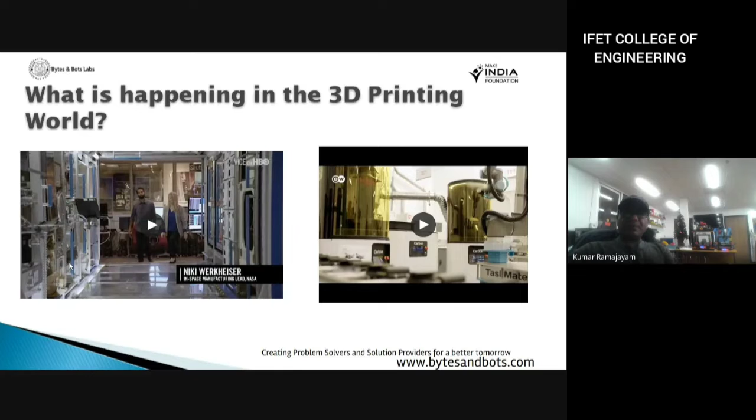I'm not going to go over the videos, you can Google them and watch them. What we're going to cover in this presentation is: what is 3D printing? In the intro, some of the faculty members talked about that a little bit. With a focus on education and innovation, how 3D printing technology has been evolving and is being embraced and used by individuals, hobbyists, and educational institutions, from elementary to secondary to post-secondary educational institutions across the world. And it's the inherent nature of supporting how it enables curious minds to make new things and take an individual's creation to the global market across the world. We'll talk about that.

Some basic information about the different types of 3D printers, what are the different components of a 3D printer, and what can you do with it.

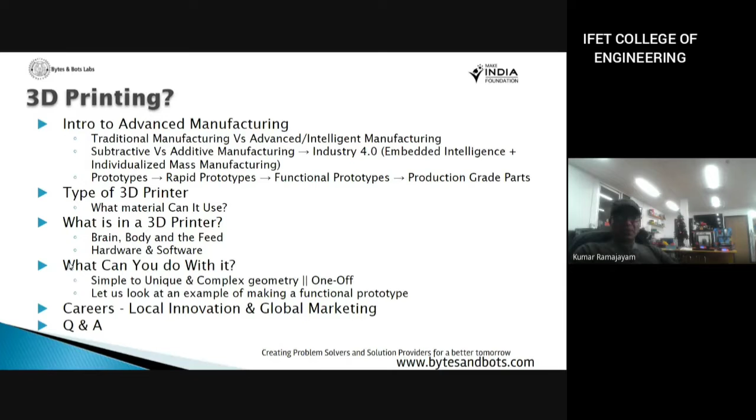That being said, let's move on to our own lab. From an idea that you conceive, you digitize that idea by using a CAD software, saving that off in a file format, and printing it.

So this short video here is showing. Let's get some practice designing a machined part like the one you see here. You can see that for the most part, it's made up of extrude features, which added geometry and removed geometry for the pockets and cuts, as well as some fillets to break the sharp edges.

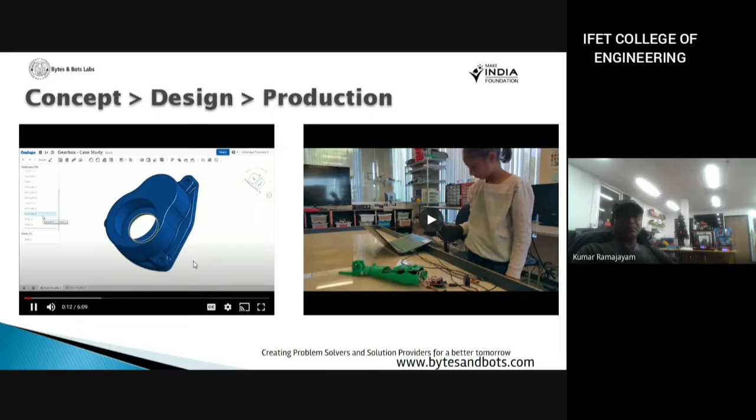Now let me switch over to this other part studio to get started. For this example, I have a sketch already created. The two-dimensional geometry here can be created in Onshape using the various sketch tools and constraints. But for this example, I'd like to show you how you can leverage a sketch like this, which contains multiple sketch profiles, to create the 3D geometry for the part using various features.

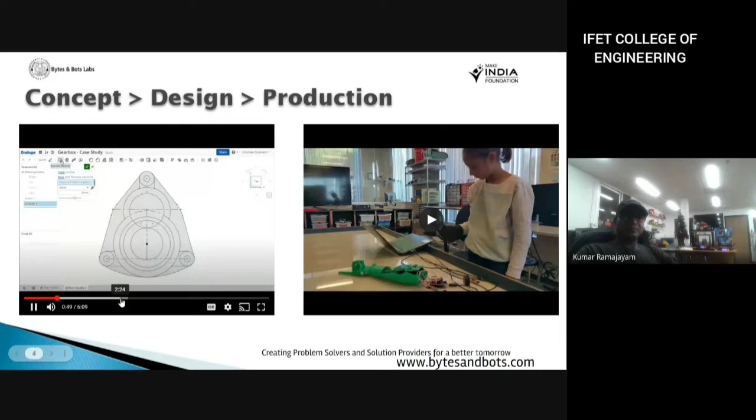To get started, I'll extrude the main body of the part. I'll make sure all of the sketched geometry is deselected and select the extrude icon from the toolbar. I'll select the interior profiles to create the geometry for the body of this part. I'm going to fast forward that for a moment.

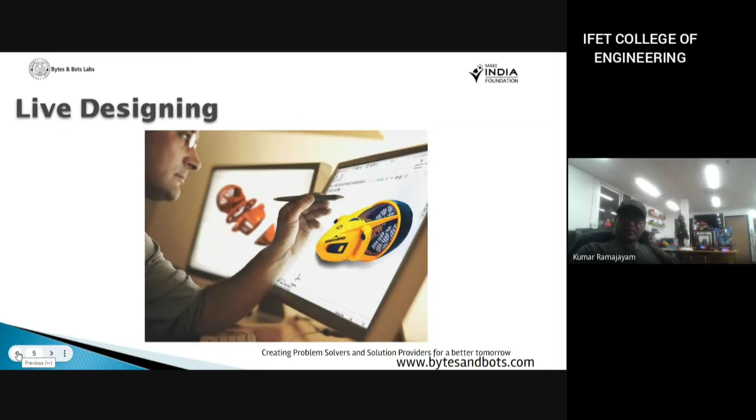So let's move on to this video. Here, digitization of your idea of a product creation using a CAD tool on the computer, and then sending it to the printer. So whether it's a coffee maker or a cup, or say I have my pair of glasses and I wanted to personalize and use my own design to design and print the frames for my glasses, I can do that in a few hours and make a one-off product that is designed and created for my glasses, fitting my face profile the best possible way. And that's pretty cool to do.

And you don't have to be an engineer. You don't have to know everything. You're able to Google most of this, and even download an existing file and modify it. If you have the computer-aided design skills, then you will be able to print it and wear that on your face. The next example: we have a 6th grader in one of our labs who's doing biomimicry in this project.

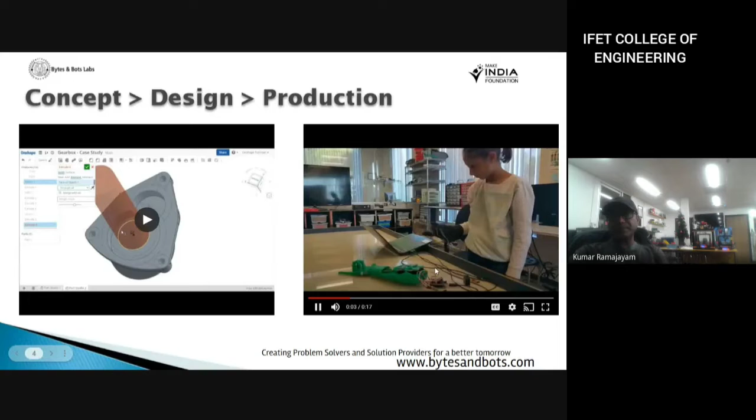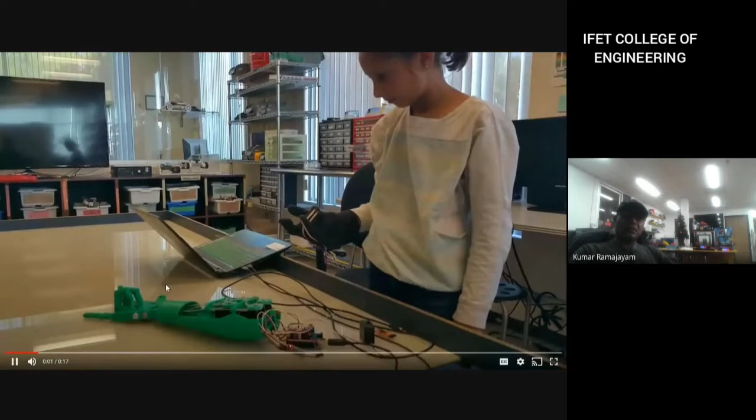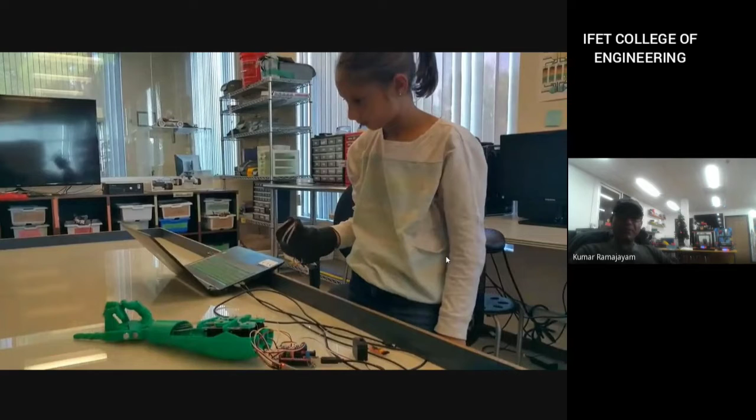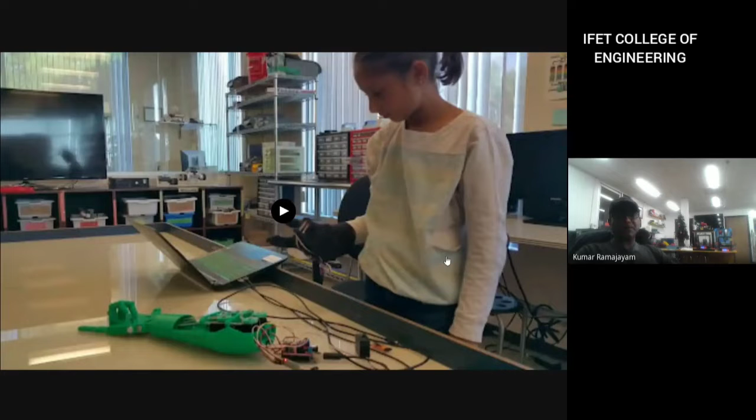That bionic arm project was designed digitally and then printed, and then she programmed it using Arduino and open source hardware, which I'm sure many of you are familiar with. And what this has done for this young girl working in our lab is it has inspired her to become a future engineer—not because her parents told her she should study engineering, but because she became interested in 3D printing technology, and she understood it is a pretty cool and fun thing to do.

Okay, so let's move on to some of the other examples in different industries. In fact, you are able to see right behind me there are a couple of 3D printers that are actually printing right now. Right there, there is a 3D printer that's printing an object, and it'll run overnight and print. I'm not sure what it is printing—I would have to ask the engineers—but it is doing something right now.

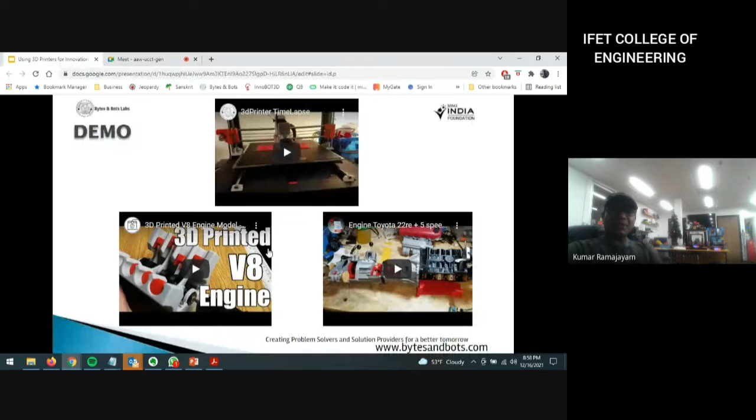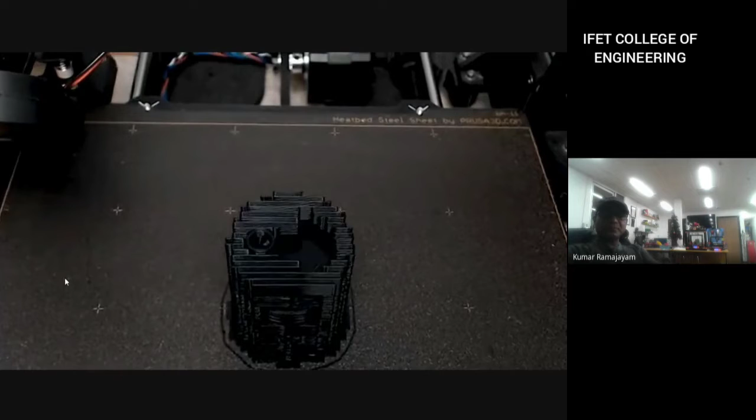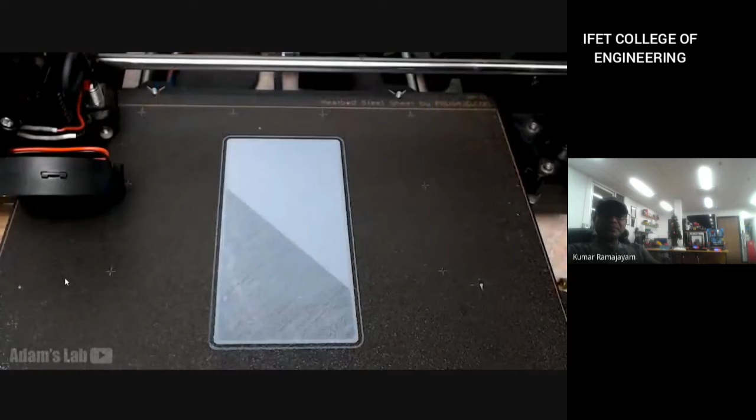Okay, so let me go back to this—I'm going to show you a 3D printed V8 engine model. So it's a time lapse, shown at a higher speed, of the whole extrusion and building and printing process as it is printing it.

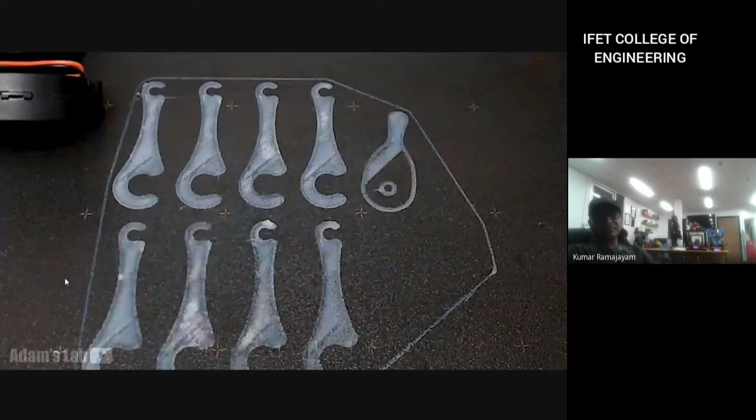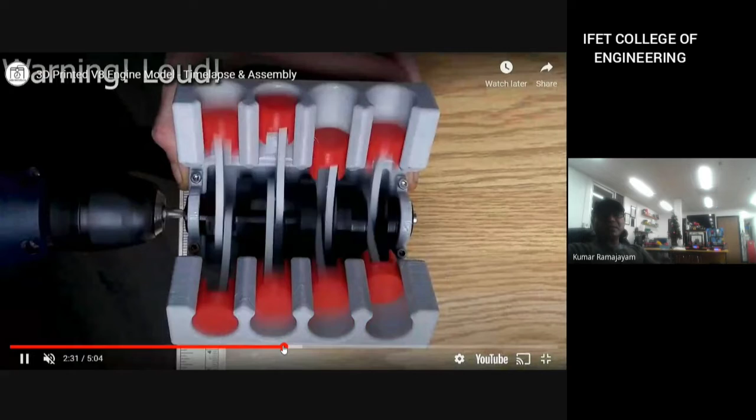So the end product here, after it prints—here is a functional prototype of the pistons, and with a simple drill they are simulating that. Again, how cool is that?

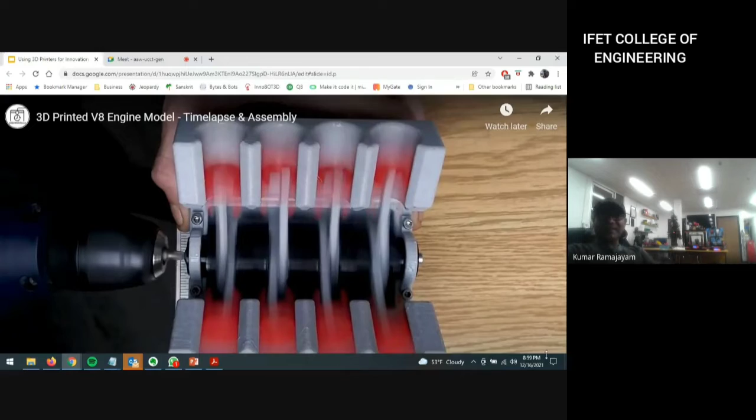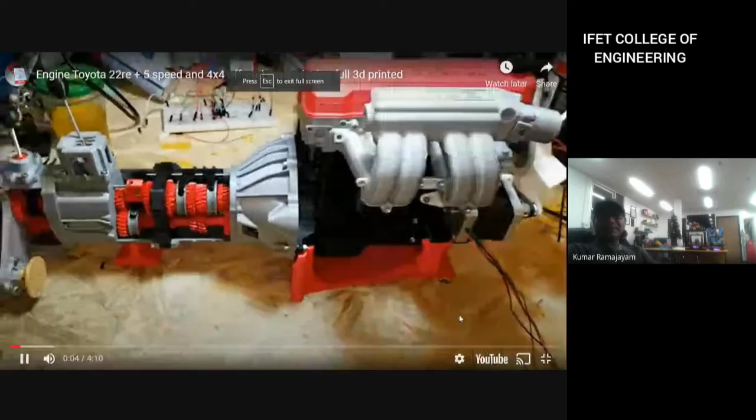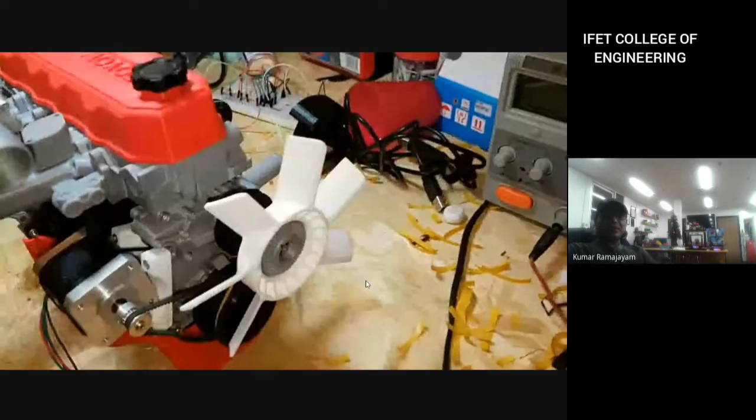And then another quick example, a Toyota car company model. Somebody earlier during the introduction mentioned that it is used in the space station. It's used in space technologies. It's used in every aspect of life, anywhere from making some fun toys to serious one-off production quality parts that you can actually use to fix issues.

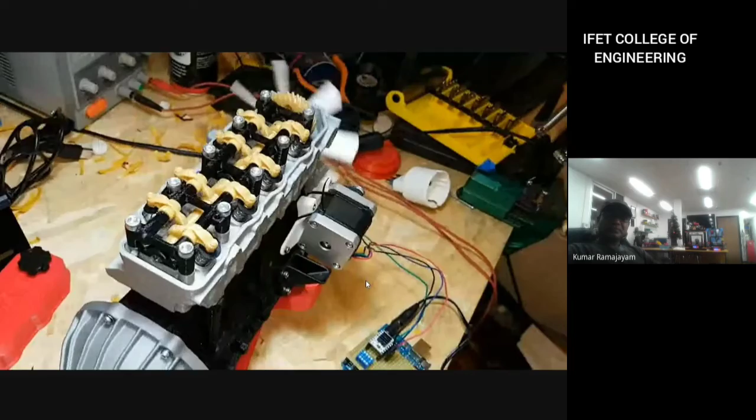So I'm going to pause this.

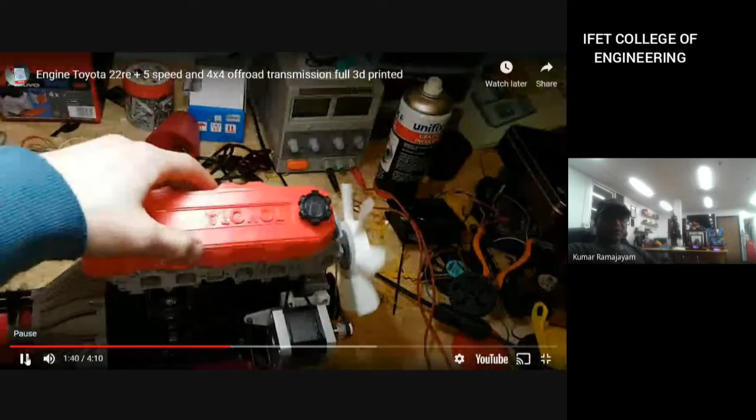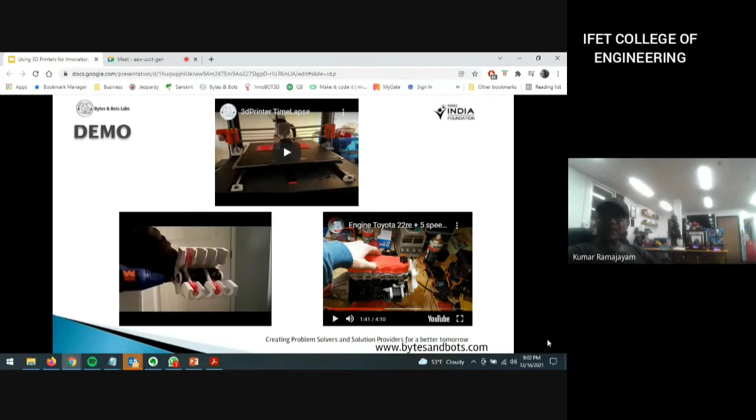A few years ago, it would require a lot of funds, resources, and people's time to make a one-off functional prototype to test something. For me, this is an amazing thing that has happened from our traditional manufacturing world.

How many of you have made a Ganesha statue for Ganesha Puja yourself, or just bought a clay model from the market? That's an example of traditional manufacturing, making a statue using clay, or making a pot you use for cooking. Then you move to the next level for industrial mechanical engineering applications, and you see how complicated and unwieldy the heavy equipment and machinery needed to manufacture materials and prototypes, whether functional or non-functional, can be.

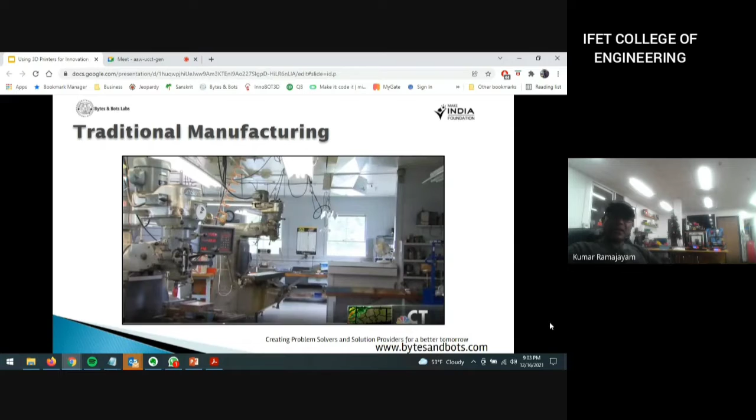And the amount of waste products extruded when using traditional manufacturing applications creates a lot of debris, an environment that is not clean, and it causes pollution. These materials can add contaminants to water resources and our land. But with 3D printing, because of its additive nature, you can specifically design and reduce all of those pollutants in the environment. So dirty manufacturing is becoming history.

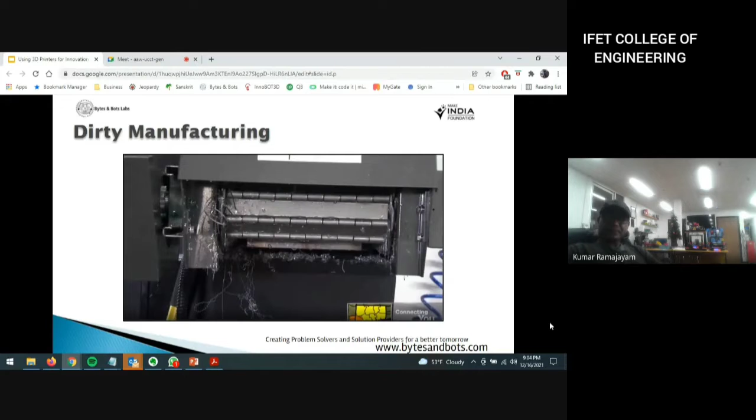Now, what's in a 3D printer? For a beginner, and this is my topic here, you are using this in the world of education. Say you're in college teaching an engineering or product design subject, an industrial manufacturing type of subject. Instead of talking about all the dimensional, physical, and spatial aspects of a project, you can quickly ask students to draw it on paper in an analog format, then evolve that into digitally designing it using CAD software, and then quickly print that object and test it.

And when studying business MBA programs, they talk about a concept called fail forward. Fail forward is very much possible, and in fact you can quickly fail and quickly fail forward so that you learn from your mistakes, update the design, make it more viable, correct the errors, and make your product in the first one or two cycles a close to finished, functional product.

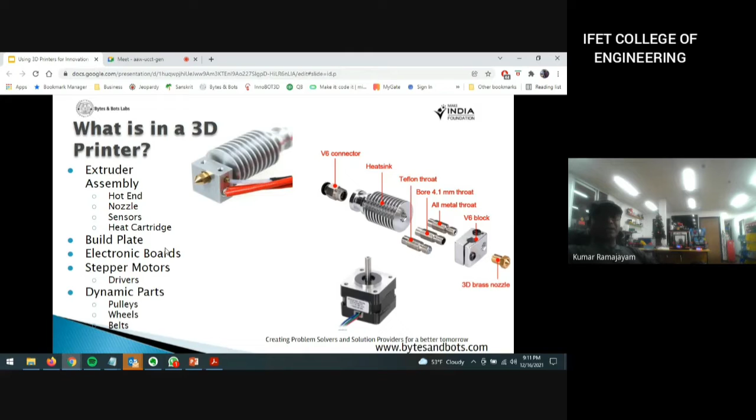Any moving locomotion aspect, the X, Y, and Z traversing of the nozzle head or the extruder assembly, they're all provided by the stepper motors and the stepper motor controllers, and the operation of the pulleys, wheels, and belts.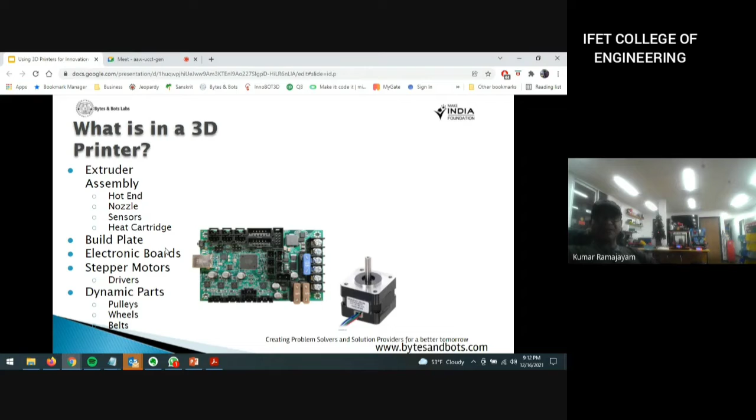So there is a controller, and we make our own controller in our lab, modeled on an open source specification. And again, as you saw, some of these specific aspects of that.

And the different types of 3D printers we have: Cartesian, Delta, Polar, Scara. You saw some of these models as I was walking around the lab and showing them to you.

And what about the nozzle size? The layering, the slicing of the melted extruded materials, so that you can have fine grain control of the printed object.

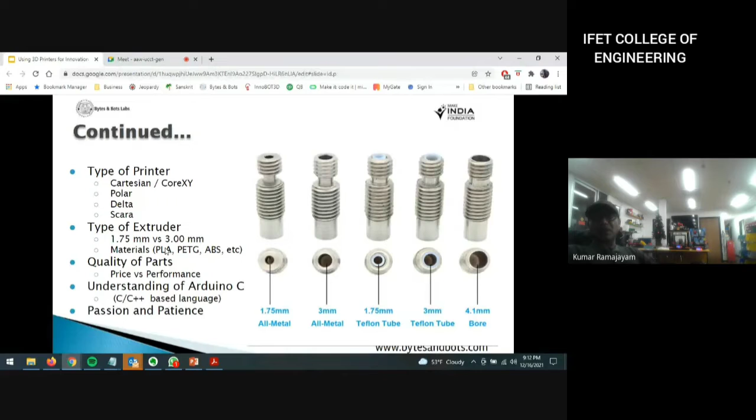By the way, a few years ago I visited all of the major 3D printer manufacturing companies in China. And also from an end user point of view, there's a place in Auroville where somebody got a 3D printer.

And then there's an industrial estate near Pondicherry I visited. And guess what? They have 3D printers, and they were very happy that it worked for the first 3 or 4 projects. After that, it got stuck and nobody was able to fix it. And they got tired of it because it never worked after that.

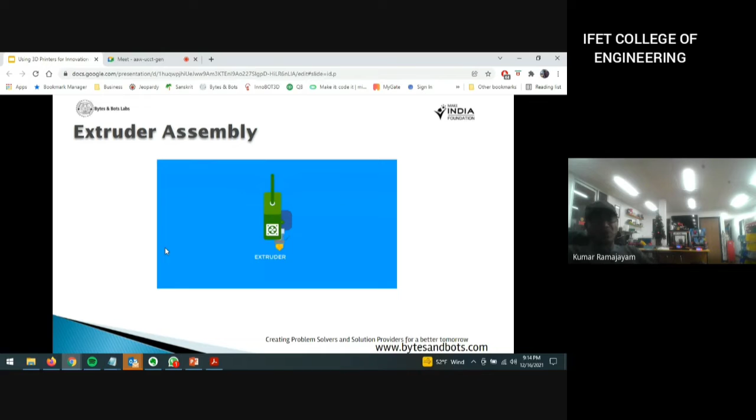That is a major problem when it comes to 3D printers. It's not like your regular paper printer, a laser printer, where you can print something on a piece of paper, and even somebody without any technical skill or knowledge can open it, change the paper, and put in the ink cartridge, and continue printing.

But with 3D printers, you need, on a regular basis, proactive cleaning, especially of the nozzle. All of the frozen materials will clog up, and that means if you're not interested, if you're a regular user, then you are stuck. That's exactly what I saw.

A lot of my friends actually bought a 3D printer for their kids. Like I said, it prints a few objects, and after that it gets dirty, and then the printer is not being used. So you have to be a lab monkey in order to actively use it and work it so that you find the benefit of it.

Coming back to the consumer-based 3D printer use and what happens to that one in the market: like I said, you use firmware typically written in C, and you have a controller program that provides the brain and logic function, the controller function, for your 3D printer.

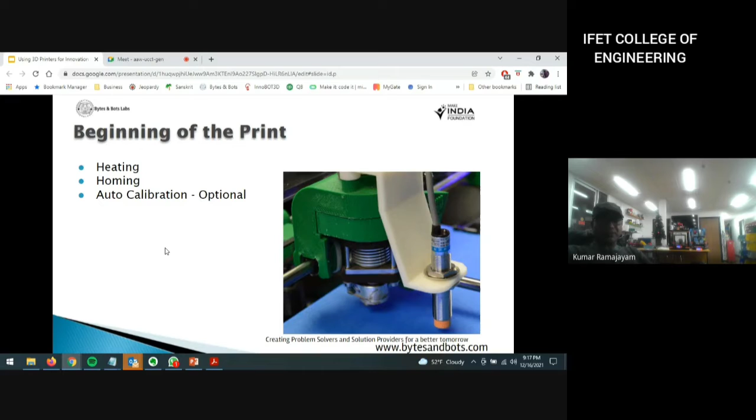You can design it yourself; they will send you a template. You go to Nike's website and draw your feet using that template, then upload that design of both your left and right foot sketch, and they will make the specific pair of shoes that work for your feet. That is what Industry 4.0 is, and we'll talk about that a little bit in one of the later slides.

Now coming back to when you print an object: it is not going to print things in the air. It needs some sort of support, especially where there are overhangs. If you're printing a tree, it has leaves that are hanging, but those leaves need to be extruded, layered, and printed.

So it will print supports for that, and then later, as part of the post-processing, you will remove those. And then the slicing is controlled. Slicing means every individual micro-level layer with the right amount of fill so that you can control the density.

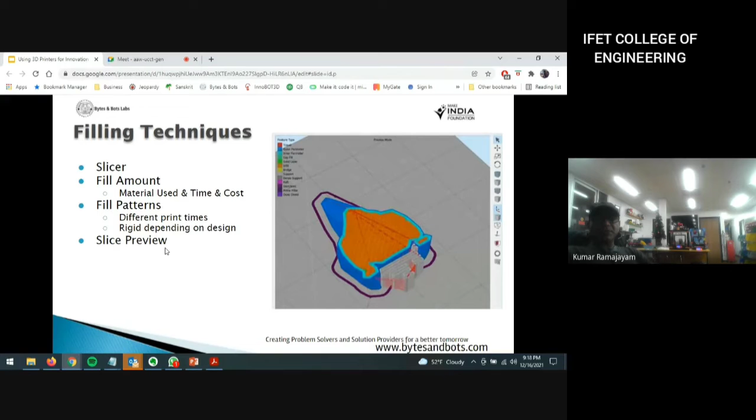Strength, etc., with that, so filling is something that you need to control. There are job opportunities where 3D printing companies and bureaus hire people that specifically work on what type of fill is needed in order to efficiently print a prototype. Okay. And here is a one-off that needed the support.

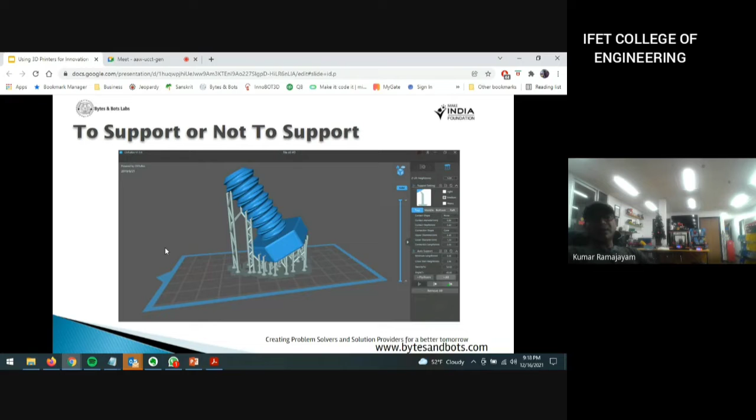So you wanted to print this nut, a screw, and so you need to design that and then also tell the 3D printer, oh, you need to have these types of support so that the extrusion will go smoothly and you will have the end product for that. And you have to configure that like you will configure a regular printer to do that. In the printer configuration software interface, you can do that.

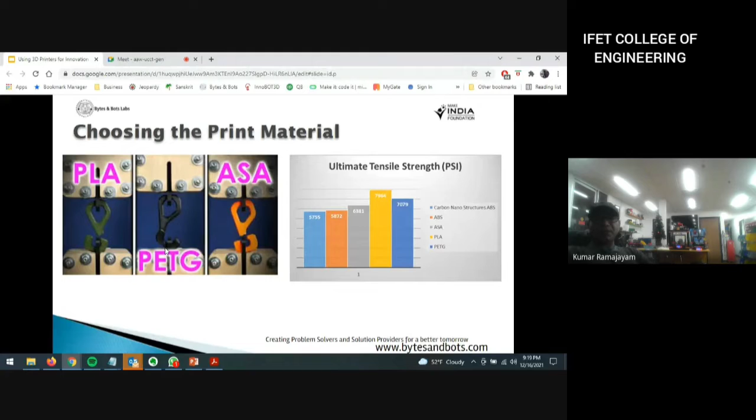And there's also a long list. I heard even recently they are sourcing coconut fiber from India and the Philippines, and they are using that as part of the extruded material, making it so that you can create environment-friendly materials. And this slide shows some of those examples.

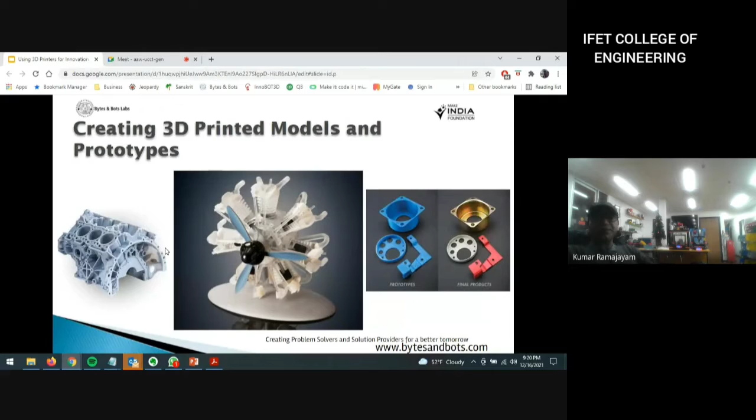When it comes to prototyping, prototyping for industrial use or prototyping for your own personal hobbyist or fun use, all are possible. Remember at the time...

When I went to the tailor—say I'm 55 years old, back when I was in Tamil Nadu, before I came to the US, before I went to college in India, when I was, say, in 7th grade—before the Deepavali festival, my dad would take me to the store, the streets in my hometown, and we'd buy the fabric, the cloth. Then you'd go to the tailor, and the tailor would measure your body, and then he'd say, come back after 1 week, and you will get your custom-fit, custom-tailored shirt and pants.

Now, you can do that to design and customize your own car that is street-worthy, meaning that you can drive it on the road. It is not a fun, cool toy that the kids play with. It is actually something you and your family can sit in and drive on the road and get to a destination safely and get back home. And that is called individualized mass manufacturing.

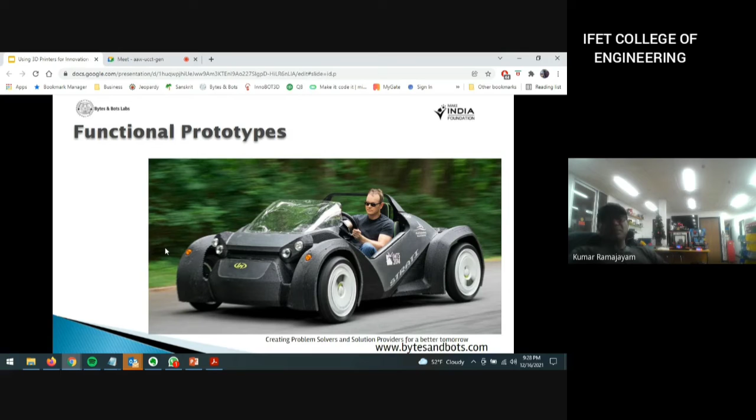So if you are able to connect that concept and make them design that on the computer, they will readily understand without going into theoretical memorization, and they will be able to actually print that and see it function—and you have the aha moment. That student will never have to memorize mathematical formulas; he will be able to learn it hands-on. That is what I call hands-on, applied, real-world based learning. You don't have to lecture them using a whiteboard, but you can rather have them discover, fail forward, and become an innovator, a problem solver for a better tomorrow.

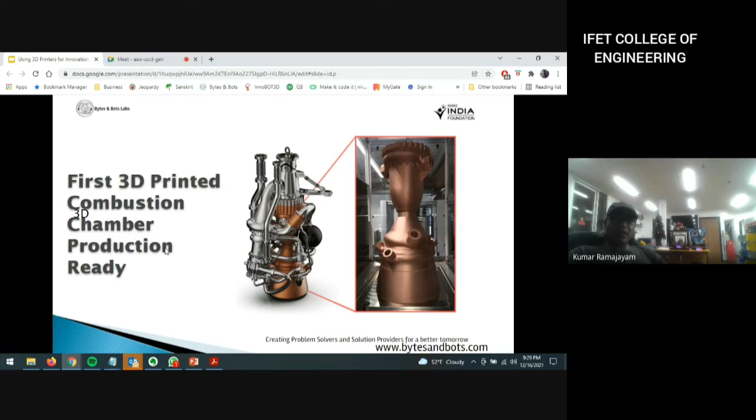And this example—the European Space Agency actually used this functional part, not a prototype but a production one, as part of the liquid rocket engine, and that was completely 3D printed and used. Here are the specs on that. You can Google it and find that.

I think India is ready and primed. It is in its prime state to get it to the next level. But our task from schools and colleges in India is to promote this by using a functional couple of 3D printers that can be built inexpensively, so college students can help high school students.

High school students can help middle school students and elementary level students. Similarly, professors and expert faculty members of universities can help their affiliated college faculty members, interacting by inspiring and introducing, giving workshops, etc., to high school, middle school, and elementary school teachers. So from the ground up in India, we can build an innovation culture using a hands-on, applied STEM—science, technology, engineering, and math—type of learning model.

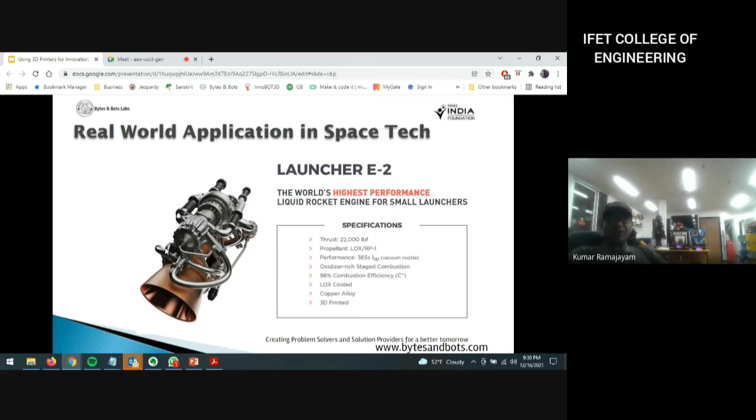I hope it makes sense, and it is very much doable. The only thing is that Indian institutions have to support it. I think we are ready, and the government, I believe, is trying to do everything.

And let's talk about another vertical market: biomedical devices. Say I was in San Jose in the Bay Area—there is a specialized company that uses this when you are a medical student going to the anatomy lab, where actual dead bodies, cadavers, are being opened, and it smells really bad when you go into an anatomy lab. You actually get to touch and feel and put that body back, and you become a doctor.

What about that? At one point you actually need that, but before that, you can use a 3D printer to create a model of, say, your heart, or specific types of valves in different sections of the heart, and then zoom in and highlight the different parts so it's easier for them to learn. So you can make medical dummies, dummy body parts, or even functional body parts that can be created. Currently, as you've probably read in newspapers and science journals, these are actively in the works.

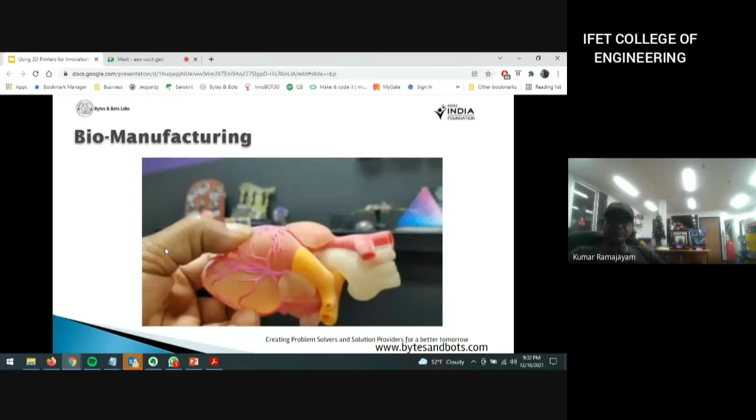What about spacesuits? Spacesuits are extraordinarily expensive and used to be very difficult to manufacture. But these days, with 3D printers' help, we are able to custom measure the astronaut and then print all the necessary parts and weave them together to create that custom suit.

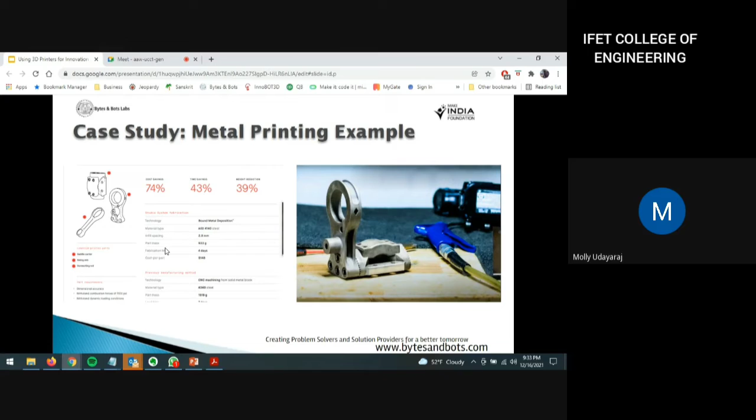There's a case study—a company called Desktop Metal, started by a bunch of MIT students who got together and formed the company. They use a special technology similar to FDM, and they are able to print one-off parts with enormous time-saving benefits and material strength benefits. In every aspect, they're able to do that.

So I told you how innovation that seemingly sounds silly - but the sillier the project is, not very serious - like a mechanical engineering professor in India would say, 'oh, just focus on this special electrical car engine or motor that you wanted to do.' And they will directly go in there and work all of the algorithms and the logic behind it, but without ever touching that, actually making a prototype first. Whereas in the US, the culture is a garage-based culture. You first start with making things and failing a few times, so that from the beginning you're focusing on quality, and your success in making innovative products is high.

So there was one project that was done in MIT that I got to see, a student did many times. Let me go to video, because right now I'm talking to the screen, hoping that I'm actually being audible.